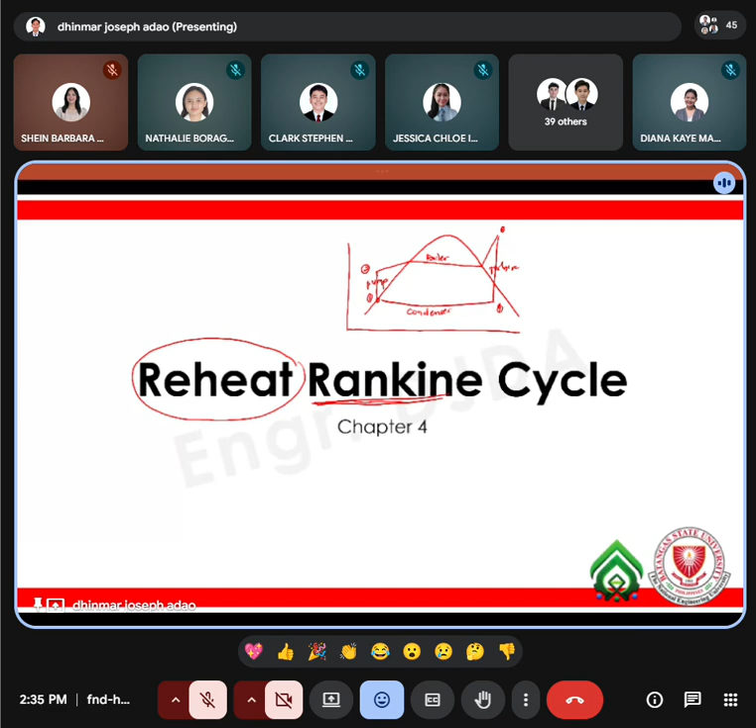Before we dwell more on your reheat Rankine cycle or chapter number 4, here are our ILOs or intended learning outcomes. First is to describe the function of each component in the reheat Rankine cycle.

The components in our reheat Rankine cycle are 5, so we added one. You have your pump, your boiler, your turbines, your reheater, and your condenser. But technically, if you're going to solve all of it, there are 6 components. Why? Because our turbine is now divided into two: your high pressure turbine and your low pressure turbine. Later, you'll see where it is located and how we can solve those components.

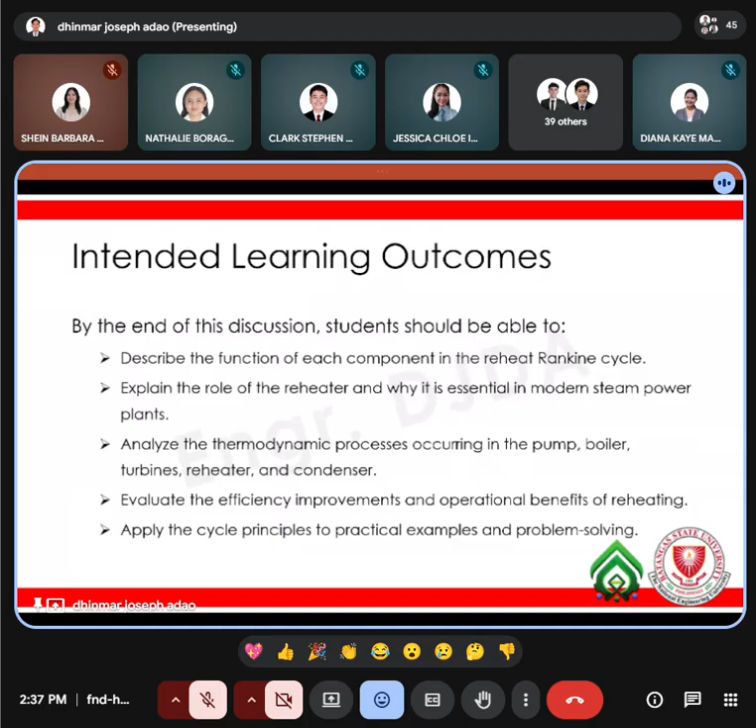Second is to explain the role of the reheater. Why is it essential in modern steam power plants? Third, analyze the thermodynamic processes occurring in the pump, boiler, turbines, reheater, and condenser. Fourth is to evaluate the efficiency improvements and operational benefits of reheating. And lastly, to apply the cycle principles to practical examples in problem solving.

Okay, starting now with chapter number 4, the reheat Rankine cycle, a modified Rankine cycle. As we may recall, as said earlier, this is the Rankine cycle: state point 1, state point 2, state point 3, and state point 4, at which you have your pump, your boiler, your turbine, and your condenser.

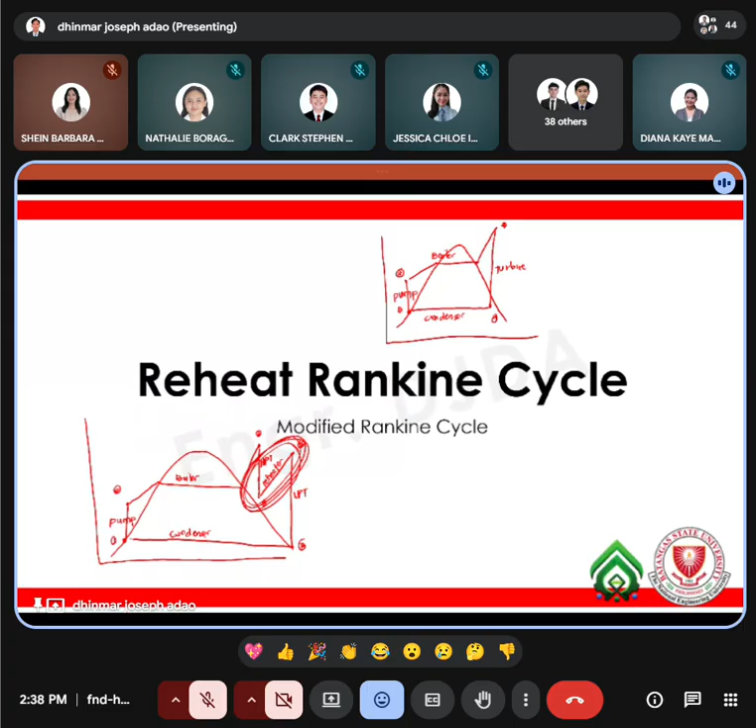Okay, reheat Rankine cycle as a modified Rankine cycle. The reheat Rankine cycle is a modified version of the simple Rankine cycle designed to overcome the limitations that arise when engineers attempt to improve efficiency through higher boiler pressures. In the basic Rankine cycle, the improvements we can make to improve efficiency are these three: lowering the condenser pressure, superheating steam, and increasing the boiler pressure.

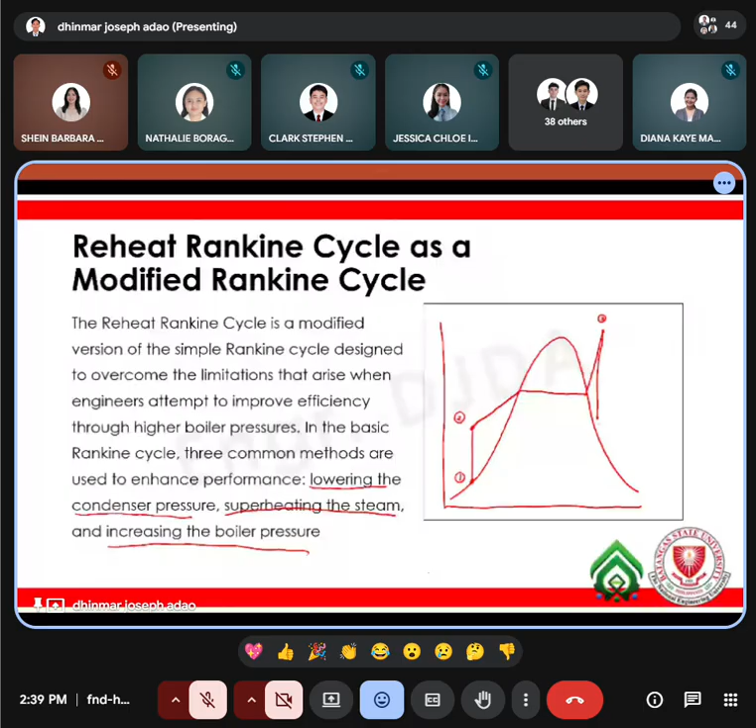These three are what we discussed in chapter 3 recently. And again, let me draw again here a diagram for a Rankine cycle. State point 1, state point 2, state point 3, state point 4, state point 5, and state point 6. And again, from 1 to 2 you have your pump, and 2 to 3 you have your boiler.

3 to 4, that is your high pressure turbine, or HPT. Then 4 to 5, this is your reheater. And 5 to 6 is your LPT, or low pressure turbine. And lastly, 6 to 1 is your condenser.

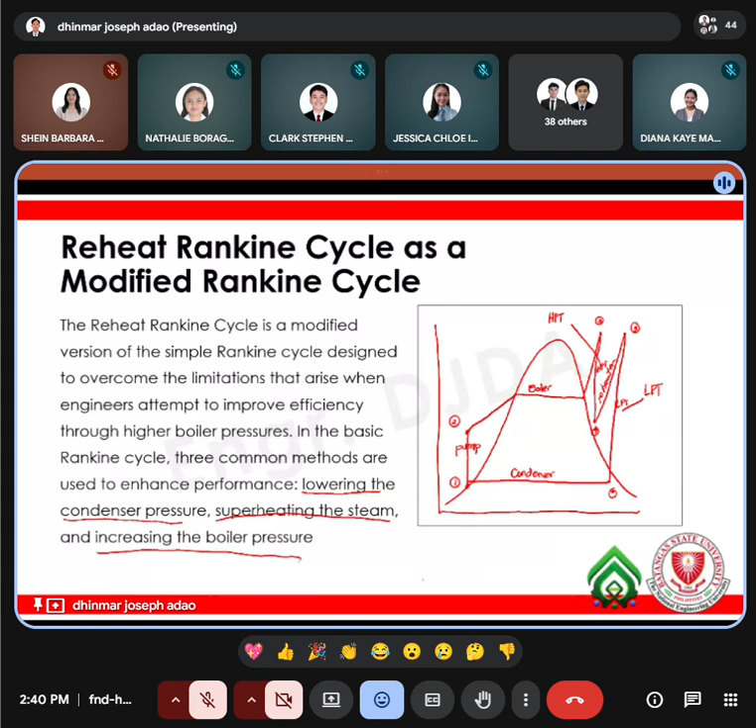Okay, so you have here your first one, your pump. The pump will pump water or fluid going to our boiler. Once it's in the boiler, our fluid, the water, will become steam. So once it becomes steam, it goes to the turbine.

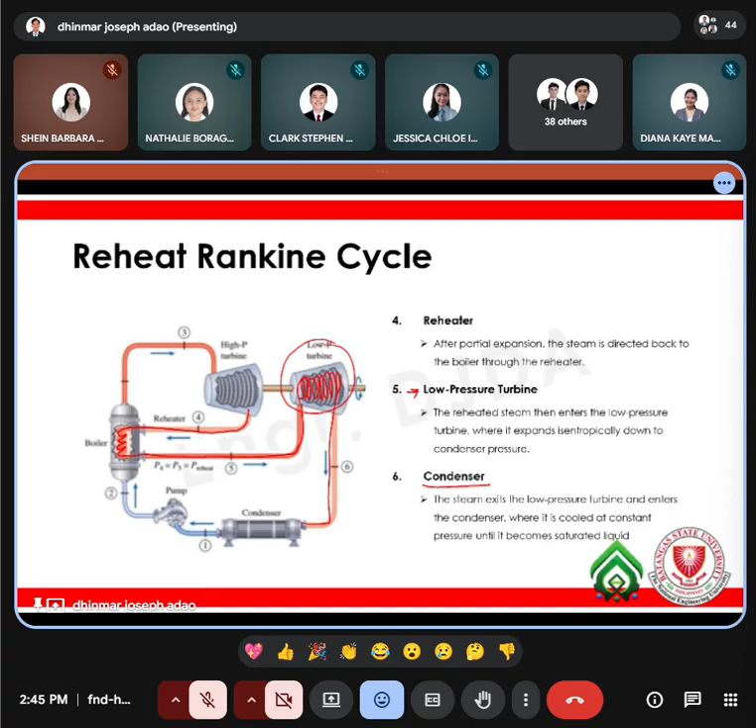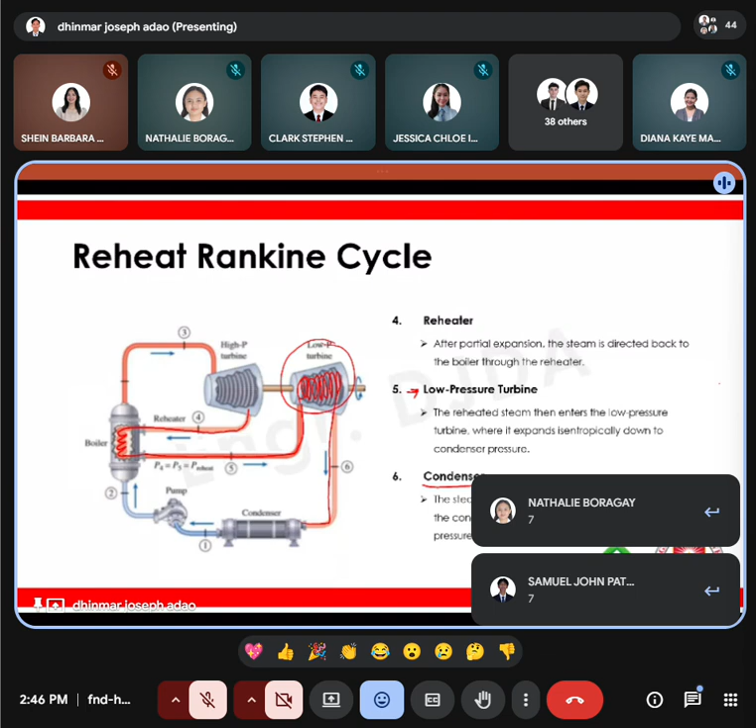Great. Now, after knowing your components, balikan natin yung diagram. Mas madali pa natin siyang maintindihan if alam na natin yung ginagawa ng bawat component. Let's have it here. Okay. Process 1 to 2, this is your pump. After your pump, pupunta naman daw po siya sa boiler, and that is process 2 to 3. This is your boiler.

After your boiler, kapag mainit na daw po yung ating steam, mainit at naging superheated vapor, pupunta daw po siya sa ating high pressure turbine. So, your process 3 to 4 is your high pressure turbine. Then after po magamit ng high pressure turbine yung ating fluid, pupunta naman daw po siya sa ating reheater. And reheater is process 4 to 5. Okay? So mainit na ulit. Na-reheat na natin yung ating fluid.

Ngayon, tapos naman ng reheater, pupunta naman daw po siya sa ating low pressure turbine or LPT. And lastly, your 6 to 1 is where your condenser works. Tinatanggal na po natin dito yung init ng fluid. Goods, mas malinaw na po ba yung diagram na ito? Process 1 to 2 is for pump, 2 to 3 is for boiler, 3 to 4 is for your high pressure turbine, 4 to 5 is for your reheater, 5 to 6 is for your low pressure turbine, and 6 to 1 is for your condenser. Can you tap your reaction po if mas malinaw na siya?

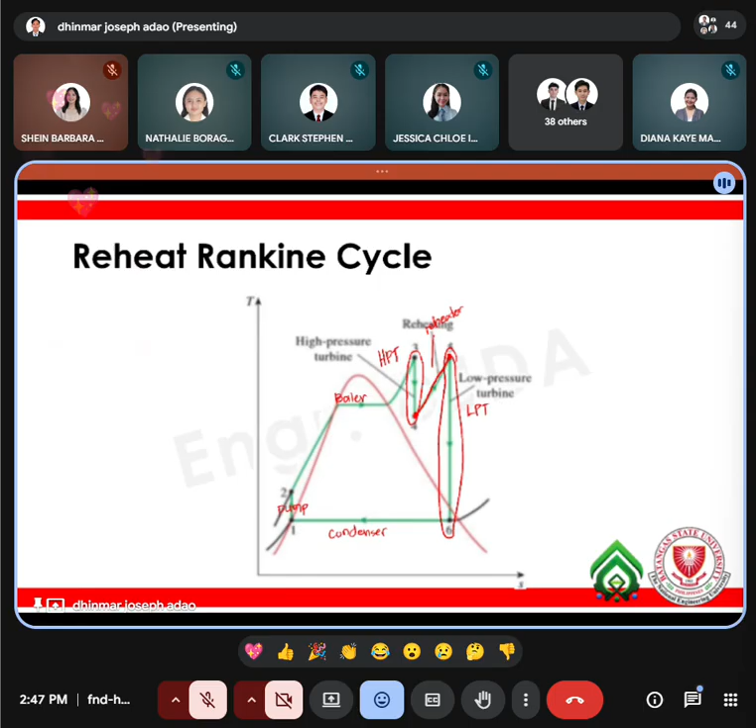Okay, thank you. Now, after knowing your components as well as this diagram, we can now proceed with the energy analysis. Energy analysis, sir? Yun po ba yung mga formulas? Yes. So let's start first with your pump. Saan nga po ulit si pump? Process 1 to 2. Does your pump have work? Yes po, sir. Nagtatrabaho po si pump. And the formula for this one is, which is higher, 2 or 1? Mas mataas, sir, si 2 kaysa kay 1. So technically, the pump work is H sub 2 minus H sub 1. And this is the same as this one.

Next, let's have your heat inputs. Saan po ba tayo nagpapainit? Sir, sabi niyo po sa boiler tsaka sa reheater. So let's start first with your heat input in a boiler, Q in sub B. The boiler is 2 to 3. If you're going to calculate your heat in a boiler, you should use your enthalpy, which is higher, 2 or 3? Mas mataas si 3 kesa kay 2. So therefore, H sub 3 minus H sub 2. So that is your heat input in a boiler.

How about for your reheater? Nagdadagdag po ba tayo ng heat dito? Yes, sir. Sabi niyo po, init po ulit natin yung fluid. Your reheater happens on your 4 to 5. So for your Q in a reheater, that is Q in sub R, which is higher, 4 or 5? Sir, H5 po kaysa H4. Therefore, your formula for the Q in a reheater is H sub 5 minus H sub 4.

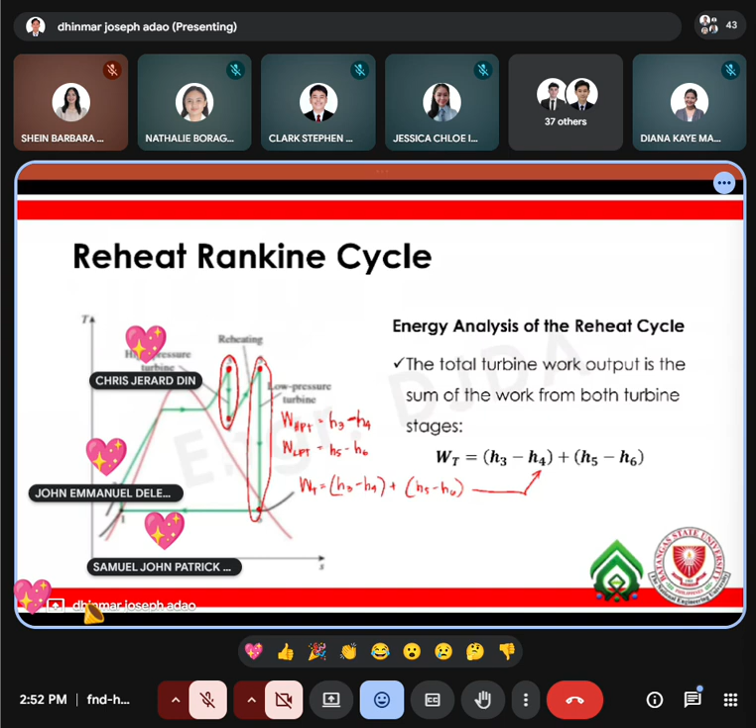Okay, that's good. Now, after getting your work of your turbine, you can now get the last component, and that is your condenser. Sir, saan nga po yung condenser natin? Dito po, sir. So sa condenser, nagtatanggal tayo dito ng heat. And we call that one Q sub out.

Okay. Ano po, sir, ang mas mataas sa 1 at 6? Eh, pantay lang po sila dito. Paano po yun? So you count 1, 2, 3, 4, 5, 6, which is higher sa numbers. So 6. Therefore, your formula here is simply H sub 6 minus H sub 1. And this is the same as this one. Okay? So that is the formulas for your components in a reheat Rankine cycle.

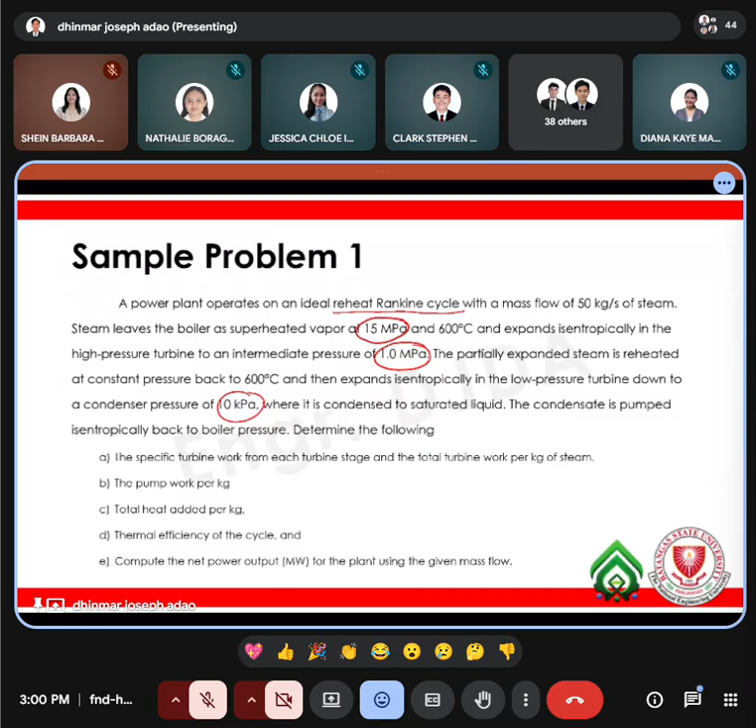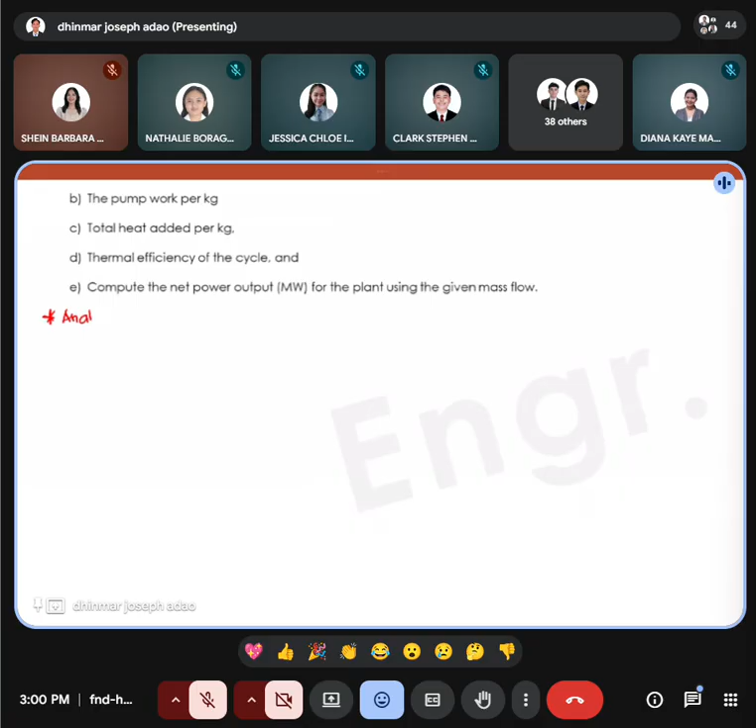Okay, now let's try to have your analysis. Okay, for your analysis, sabi natin, alam po natin na this is a reheat Rankine cycle. Okay, so pwede na agad tayo mag-proceed sa analysis na ganito yung rule. Process 1, 2, 3, 4, 5, and 6. Okay? Reheat Rankine cycle for my TS diagram.

So sabi natin, meron po tayong tatlong pressure. Sulat natin dito. Pressure is 15 megapascal. You have another pressure that is 1.0 megapascal. Isa pang pressure which is 10 kilopascal. Okay, let me give you a tip or a technique para madali natin siyang malalaman kung saan natin ilalagay itong mga pressure nito. Okay, your highest pressure, which is 15 megapascal, is always for the boiler, or kung sino po yung pinakamataas na pressure, siya po yung nasa pinakataas. So, since this is 15 megapascal, pinakamataas po natin dito is dito, 15 megapascal.

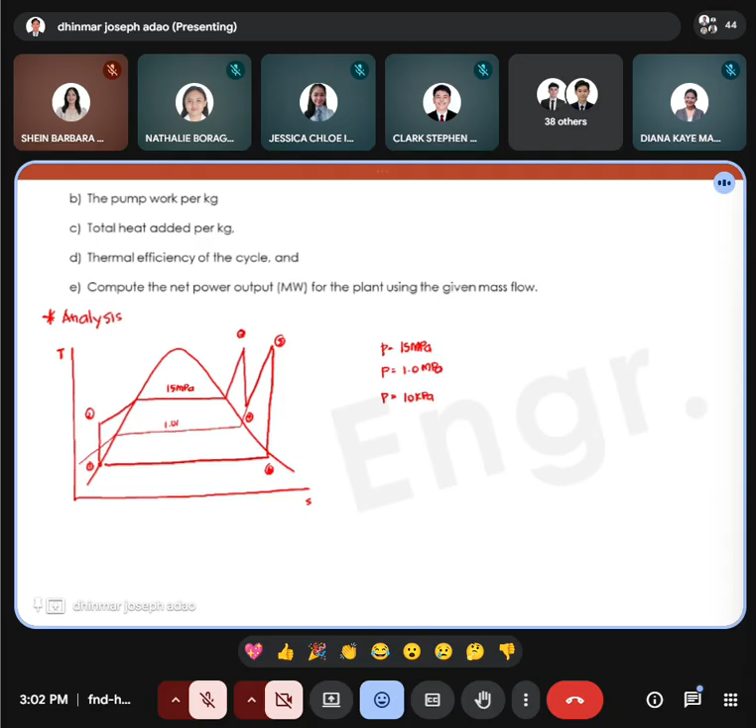Ay sir, saan po yung 1.0 megapascal? Yung 1.0 megapascal po natin is dito. Meron po kasi tayo dito pressure. Okay, so that is 1.0 megapascal. So if you're going to locate, saan po ito? This is 1.0 megapascal. Okay, and lastly, yung pinakamababa nating pressure, lagi po siyang sa condenser. So that is 10 kilopascal. Okay, so try to convert it to megapascal. So this would be 0.010 megapascal.

Okay, let's try to define yung mga pressures po natin on your state points. Pressure of 15 megapascal is for P2 is equal to P3, 15 megapascal. About your P4 and P5, that is 1.0 megapascal. Then your P1 and P6 is equal to 0.010 megapascal. Are we goods? Nakita po kung paano po natin nilagyan ng pressures itong ating diagram or yung analysis, kung paano din po tayo nag-identify ng ating anim na given P1, P2, P3, P4, P5, and P6.

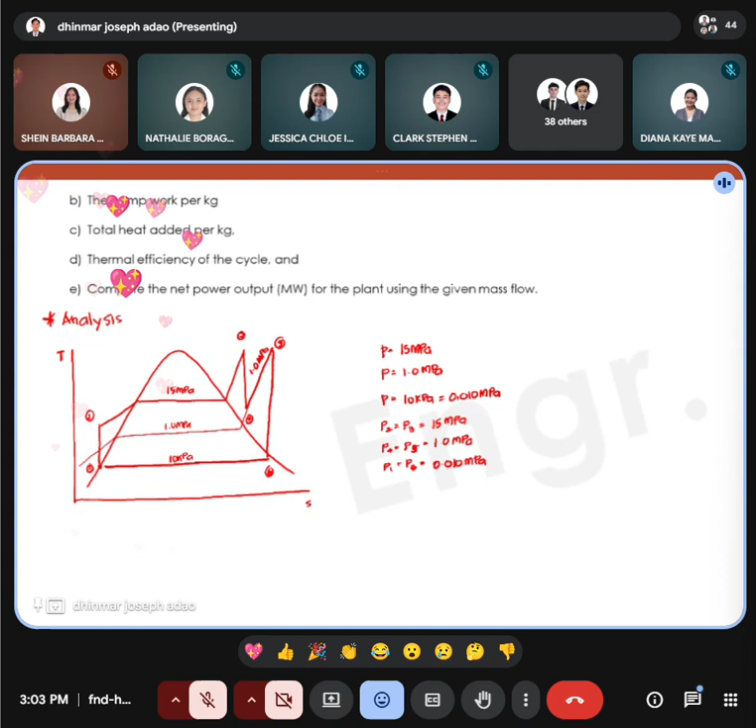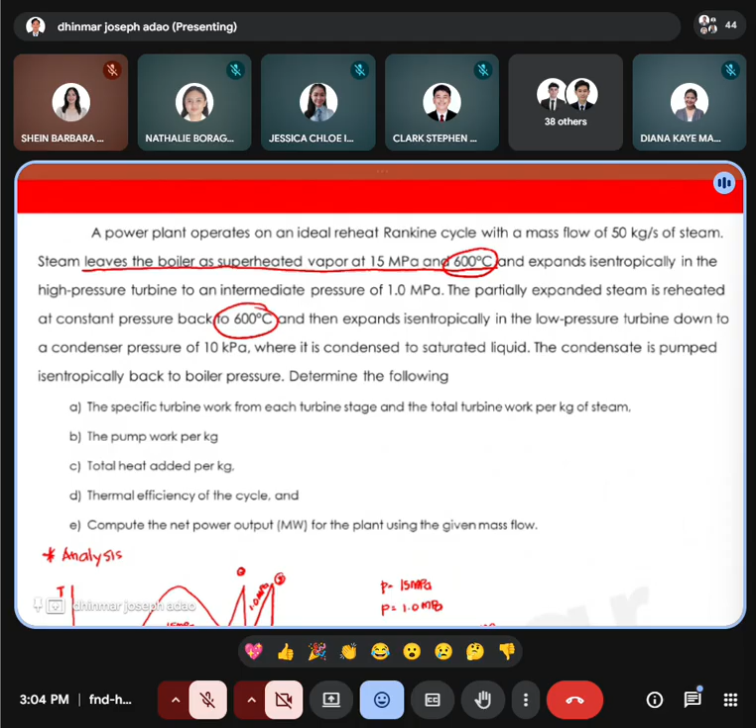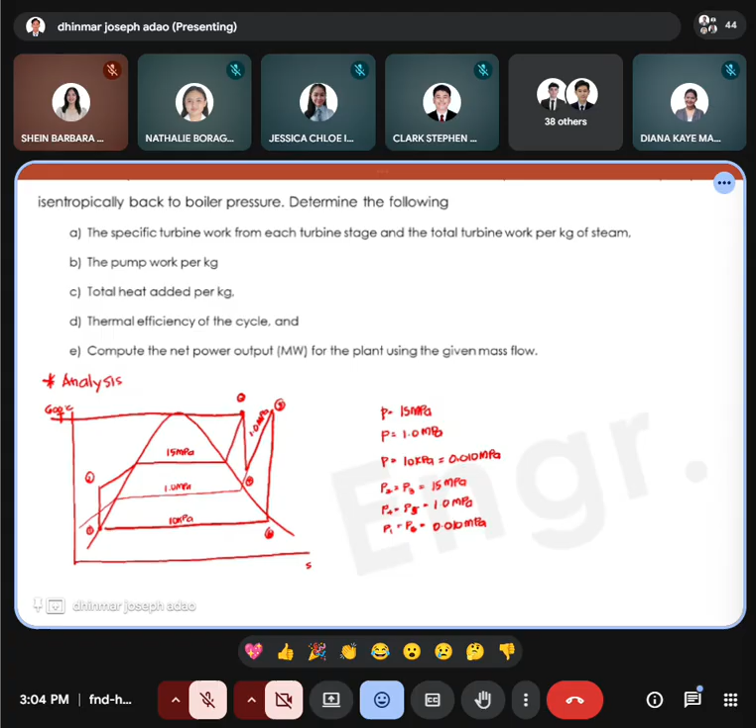Okay? Now, let's try to get other givens from the given problem. We have the given temperatures, which is 600 degrees Celsius and another 600 degrees Celsius. So, saan po namin siya ilalagay, sir? Okay, basahin natin. Steam leaves the boiler as a superheated vapor at 15 megapascal and 600 degrees Celsius. Saan po ba yung exit ng boiler natin? Based sa drawing, based po sa ating kaalaman. Yung exit, sir, ng boiler is state point 3. So, ibig sabihin, sir, dito po namin ilalagay yung 600 degrees Celsius. Okay po. Tapos, sir, yung isang 600 degrees Celsius, ano naman po ba siya?

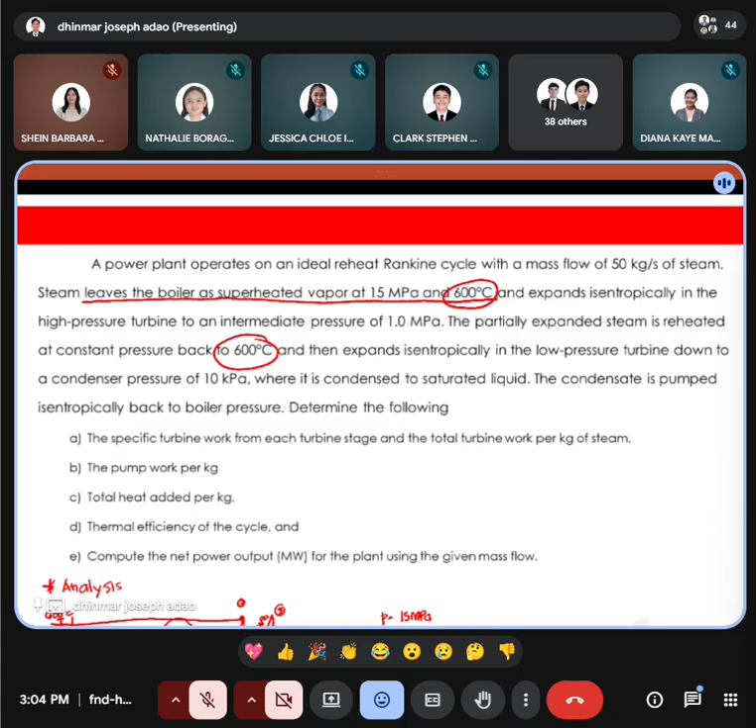Sabi po dito, the partially expanded steam is reheated at a constant pressure back to 600 degrees Celsius. Ibig sabihin, exit daw po ng reheater natin. Saan po ba yung exit ng reheater natin dito? Sir, if this is my boiler, this is my high pressure turbine, therefore, my state point 5 is my exit of the reheater. Therefore, same po ng temperature yung exit ng boiler and exit ng reheater. Sir, pwede po ba yun? Yes po. Sir, what if isa lang po yung ibinigay na temperature? Wala po ibinigay sa exit ng boiler or sa exit ng reheater. So, you must include the assumption na ang inyo pong ginamit na temperature at the exit of the boiler and exit of the reheater is the same.

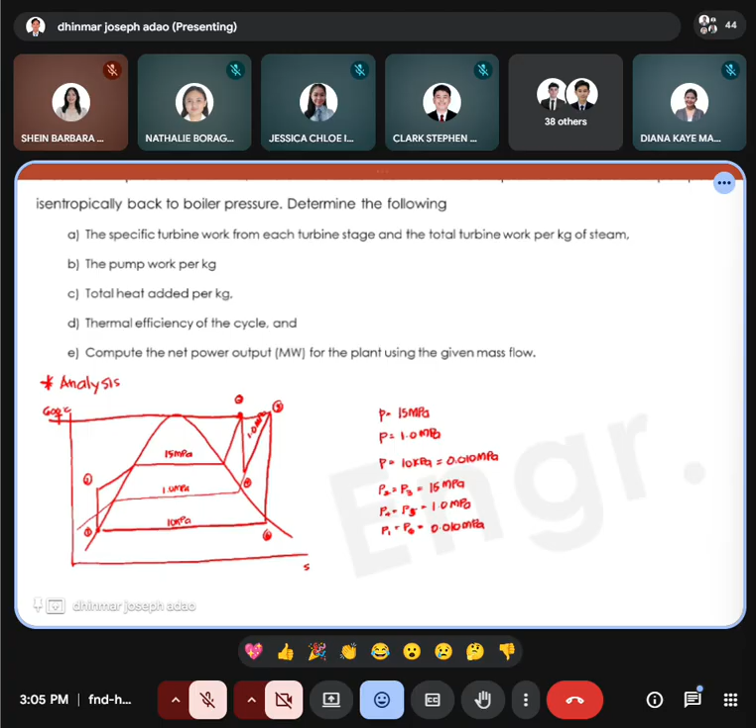Sir, is there a chance na magkaiba po ang temperature ng dalawa, nung exit po ng boiler at exit ng reheater? Yes. Okay? So, from this given problem, dito muna tayo mag-focus. So, your temperature 3 is given by 600 degrees Celsius. And your T5 here is given by 600 degrees Celsius. So, meron na po tayong 8 na given. Maliwanag na po ba yung analysis po natin?

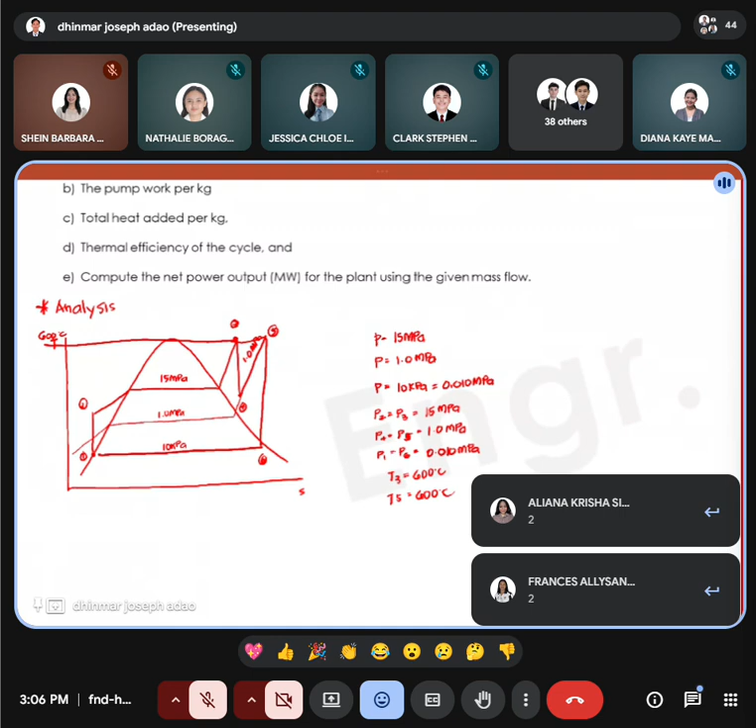Okay, that's great. Now, after doing your analysis, we can now proceed with your solution proper. Okay, let's start with your state point number 1.

That's state point 1. At your state point 1, what do we know here? Sir, alam ko po ang state point 1 po is having a pressure of 0.010 megapascal. And sabi niyo, sir, assume po lagi natin siya na saturated liquid. So if that's the case, this is pressure. You look at your table number 2. Okay? Ano pong hanap ng table 2? Yung H sub F po, which is equals to H sub 1, and V sub F po, which is equals to my V sub 1.

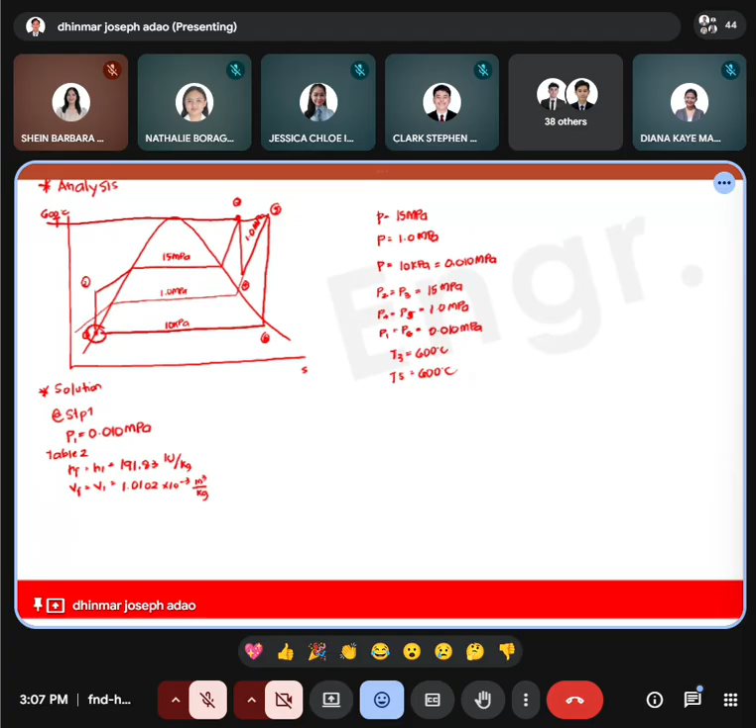So upon looking on your steam table, what would be the value of your H sub 1 and V sub 1? That is 191.83 kilojoules per kilogram, and your V sub 1 is equals to 1.0102 times 10 raised to negative 3 cubic meter per kilogram. Goods. Same po ba tayo? Enthalpy 1, 191.83 kilojoules per kilogram.

Okay. So I have noticed on your exam, yung iba po ang ginamit po ay internal energy. Ang ginamit po nila is 191.82 kilojoules per kilogram. So dapat po kapag tumitingin tayo ng steam table, tingnan po natin ang maigi kung saan po tayo nakatingin. Pwede po sa internal energy, pwede sa enthalpy, pwede sa entropy. But make sure that you have written the accurate value on your thermodynamic property specific.

Okay, so now after getting your state point number 1, we can proceed with your state point number 2. What do we know on your state point number 2? Your pressure 2 is simply equal to 15 megapascal. Okay? Sir, sa state point 2, mag-compute na lang po tayo ng work of pump. Kasi po, mas madali natin makukuha si enthalpy 2. So for the work of pump, you can try to use your formula, V sub 1 times P2 minus P1. So P2 and P1, this must be in kilopascal. So convert it to kilopascal first. Okay? So upon doing and substituting the values, you can now get your work of pump.

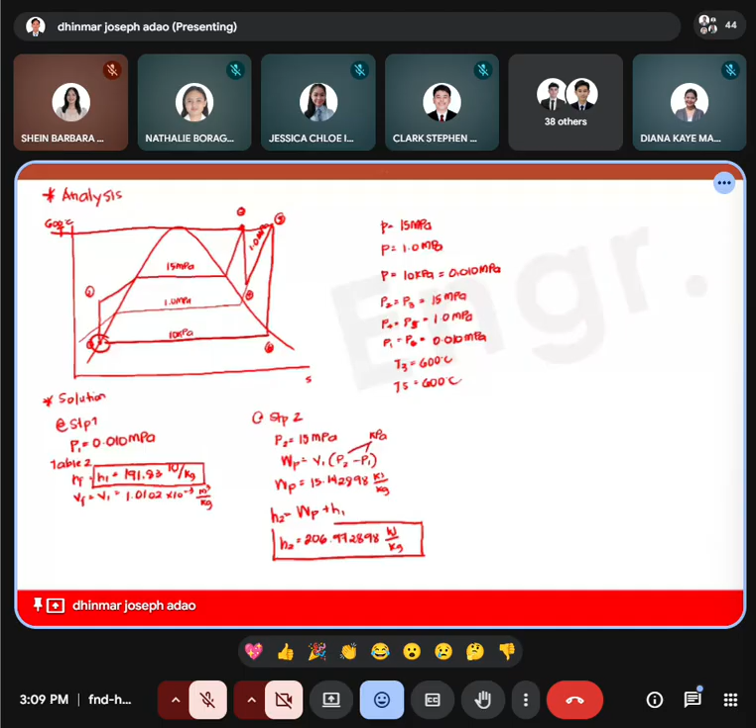So for your work of pump, you can get there the value of 15.142898 kilojoules per kilogram. Okay, so after getting your work of pump, we can now compute for your enthalpy 2. And that is work of pump plus enthalpy 1. That's all. Okay, now, what would be your enthalpy 2? To get your enthalpy 2, that is 206.972898 kilojoules per kilogram. Goods, are we having the same value for enthalpy 2?

Okay, that's good. Now, after getting your enthalpy 2, you can now proceed with your state point number 3. What do you know on your state point number 3? This is P3 is equals to 15 megapascal, and your T3 is given by 600 degrees Celsius. Ano po yung sunod kong gagawin? Sure. Kapag po ganito, tingnan po natin yung pressure. Okay, let's look with its T-sat. What is the T-sat of 15 megapascal? Based on your steam table, sir, 342.24 degrees Celsius.

Now, let's try to compare it with the T3. 600 degrees Celsius, is it greater than or less than your T-sat? Sir, mas mataas po yung T3, yung 600, kaysa po kay T-sat. Therefore, T3 is greater than your T-sat, so you can conclude that this is superheated vapor. Nakakasunod po ba? Can you tap a reaction if nasusundan po? Okay. Now, if this is superheated vapor, saang table pong titingin? Titingin po tayo sa table number 3. So on your table number 3, do we have your exact value for 15 megapascal and 600 degrees Celsius? Yes po sir, meron po. So since meron po, so kuhain lang natin siya.

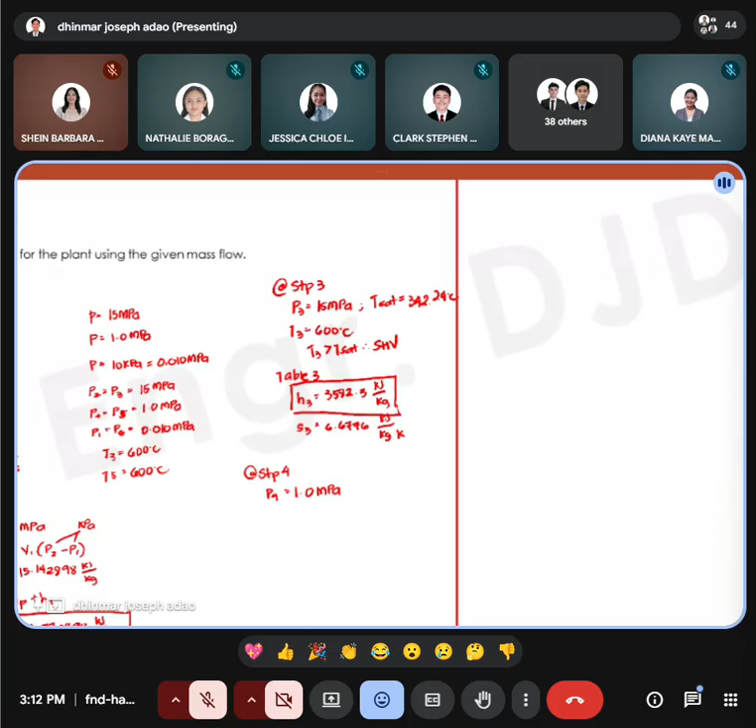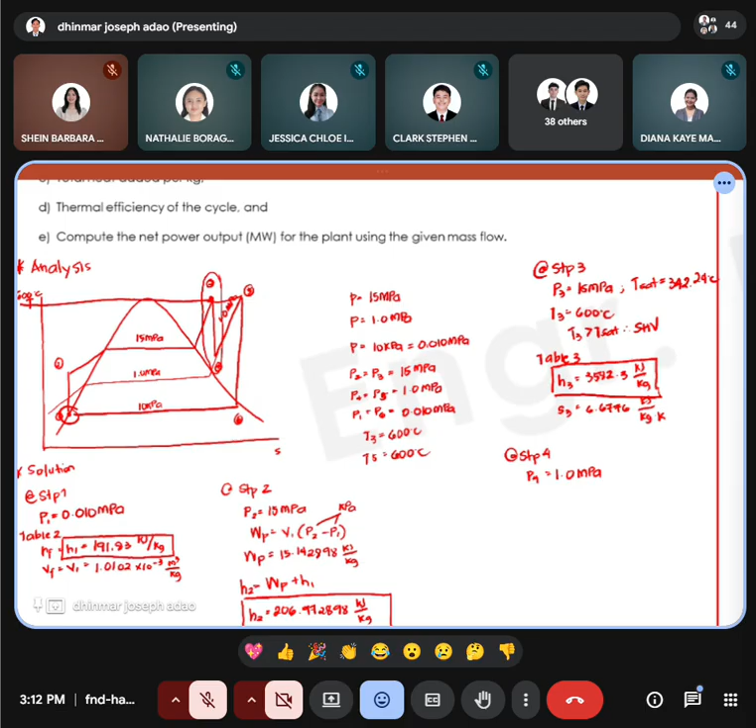At state point 4, we do know that your P4 here is equals to 1.0 megapascal. Ano pa ang alam natin sa state point 4? Sir, based on your drawing here, straight line po ito, 3 and 4. And if this is a straight line, this means this is isentropic. And if that is isentropic, therefore, S sub 3 is equals to your S sub 4. So meron po tayo S sub 3, so we can have your S sub 4. S sub 4 is equals to your S sub 3, and that is equals to 6.6776 kilojoules per kilogram Kelvin.

Okay? Now, you have your pressure, you have your entropy. If that is pressure, look for table 2. On your table 2, kindly look for your SF, SFG, and S sub G. Let's try to ask Engineer Mark Fahilan.

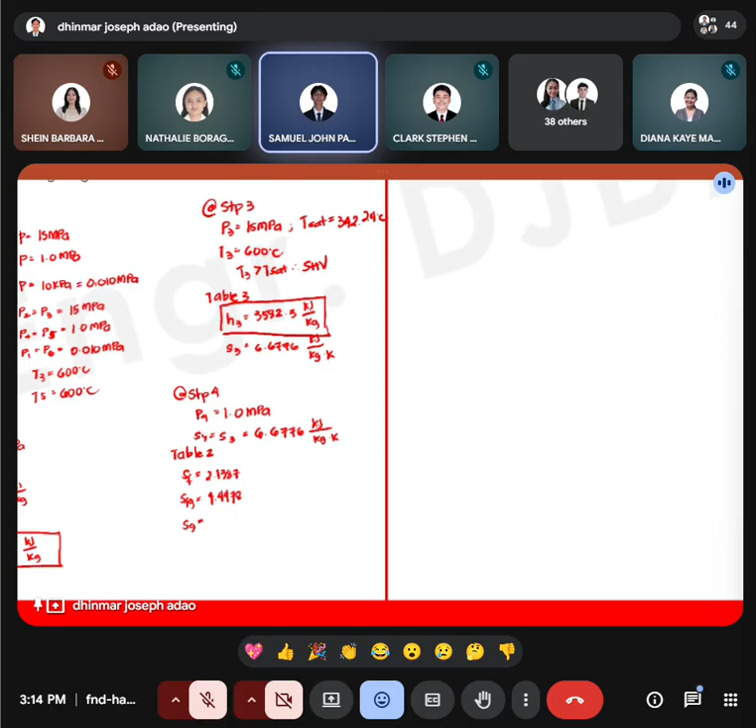Sorry, Engineer Samuel, can you give me your SF, SFG, and SG? Sir, ang SF po ay 2.1387. Ang SFG po ay 4.4478. Ang SG po ay 6.5865. Okay, that's good. 6.5865 kilojoules per kilogram Kelvin. Now, we should compare your given S or entropy with your boundaries: 2.1387 for SF and SG 6.5865.

Now, let's try to compare. Is it less than SF? Is it between SF and SG or greater than SG? Sir, based on this value, yung 6.6776 po, sir, is mas mataas kay SG. So what should we do here? If your S of 4 is greater than your S of G, what is its condition? Sir, mas mataas po kasi siya sa SG, so therefore siya po ay superheated vapor.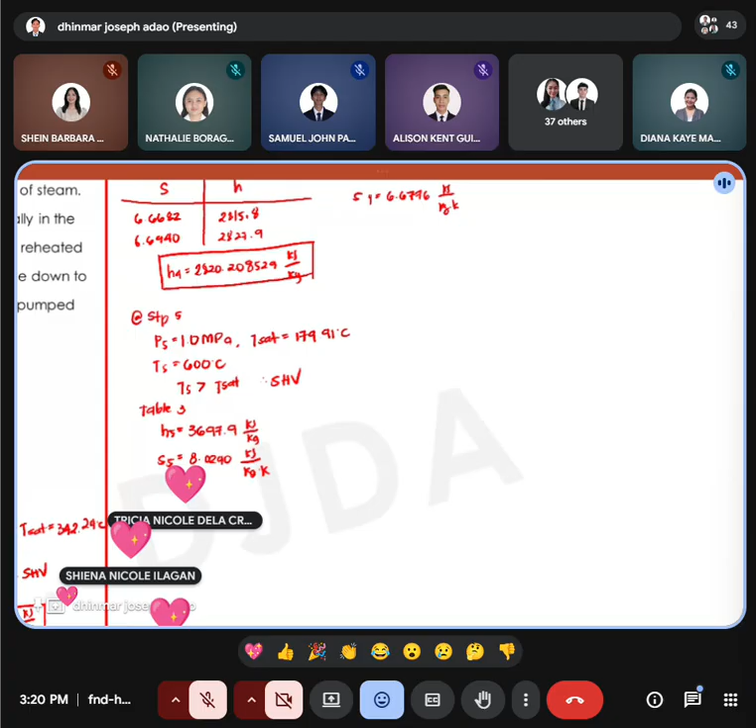Goods with your table number, state number 5. Nakita po ba itong values na ito? Can you tap a reaction if same po tayo nakikita ng values? Okay, that's great. Now, after getting your state point number 5, let's move with the last state point, that's state point number 6. Ano naman po yung alam natin sa state number 6? Meron po tayong given dito na pressure, P6 is equal to 0.010 megapascal.

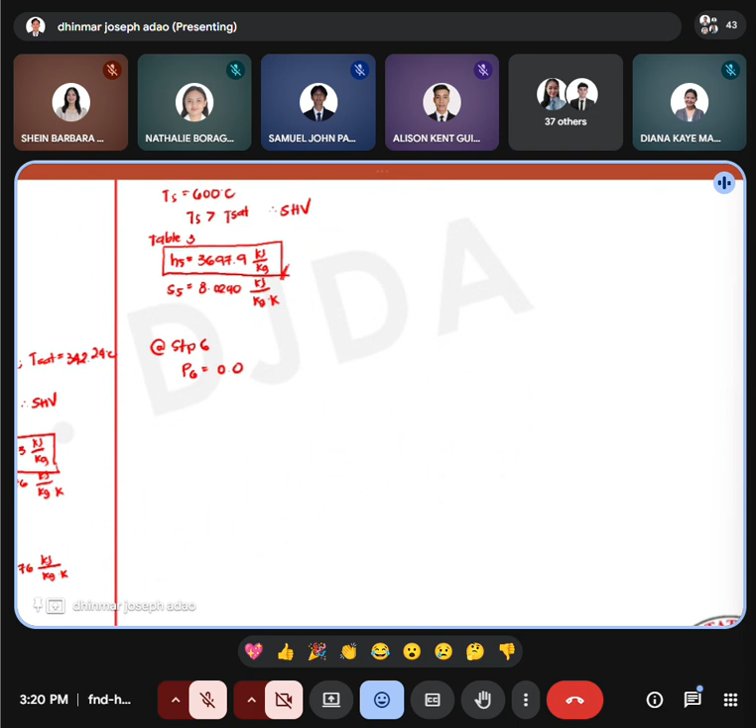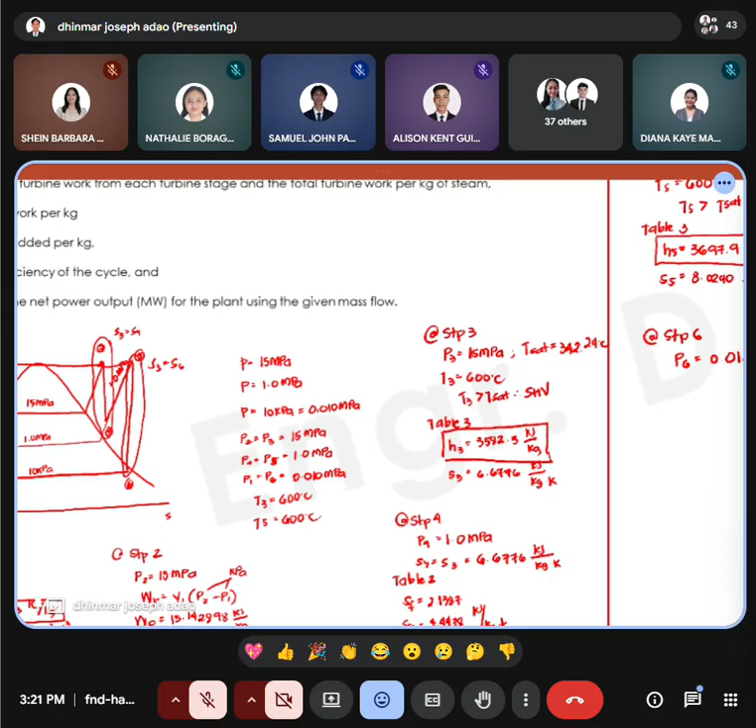Okay, 0.010 megapascal. And looking again on your diagram, meron po ulit tayo dito straight line, 5 to 6. That means it is isentropic. Therefore, S sub 6 is equal to your S sub 5, which is equal to 8.0290 kilojoules per kilogram Kelvin. Now, you have your pressure, you have your entropy. You should now proceed with table 2. Again, this is entropy, so therefore S sub F, S sub FG, and S sub G.

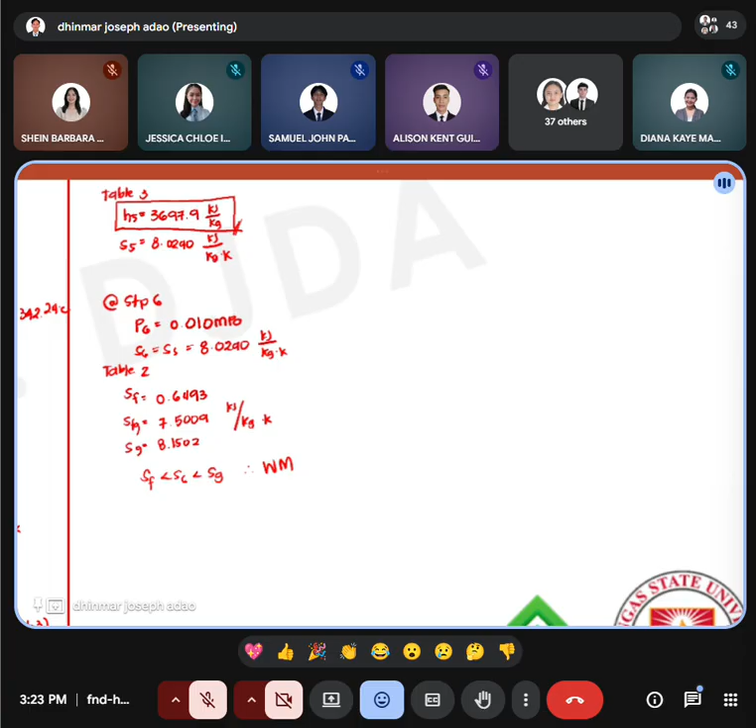Okay, if this is wet mixture, ano po yung sunod natin na ginagawa? We are getting the quality. To get the quality, you use S sub 6 minus S sub F over S sub FG. Then what would be your quality here? Based on your calculations, makukuha po natin dito na quality is 0.983841939.

Then ano nga po ulit yung hinahanap natin sa bawat state point? Enthalpy. So to get your enthalpy, you use your H sub 6 is equals to H sub F plus X times HFG. What would be your H sub 6? Okay, try to compute it.

Engineer Diana Kaye Marandan, Engineer Marandan.

What would be your H sub 6? That's good. That is 2,545.96699 kilojoules per kilogram, and that is your enthalpy 6.

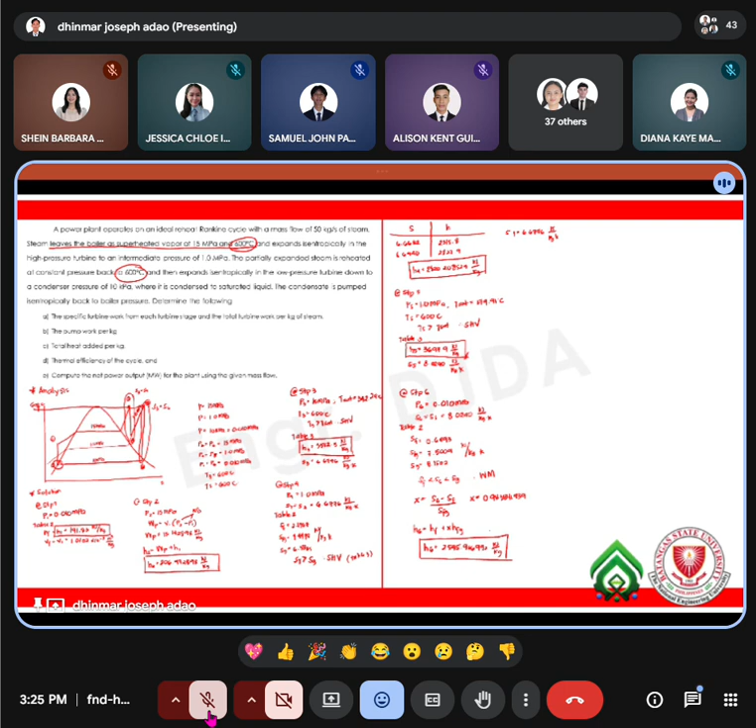So you have there your enthalpy 1 is equal to 191.83 kilojoules per kilogram. H sub 2 is equal to 206.972898 kilojoules per kilogram. H sub 3 is equal to 3,582.3 kilojoules per kilogram. H sub 4 is equal to 2,820.208527 kilojoules per kilogram. H sub 5 is equal to 3,697.9 kilojoules per kilogram, and H sub 6 is equal to 2,545.966992 kilojoules per kilogram.

Sir, pwede ko po ba siya i-store sa aking calculator? Yes, you can try to store it as A, B, C, D, E, and F. Okay, pwede nyo pa i-store sa inyong calculator.

Now after storing the values, what should you do next? Sir, pwede na po ako mag-start sa mga components ko. Let me start with my pump.

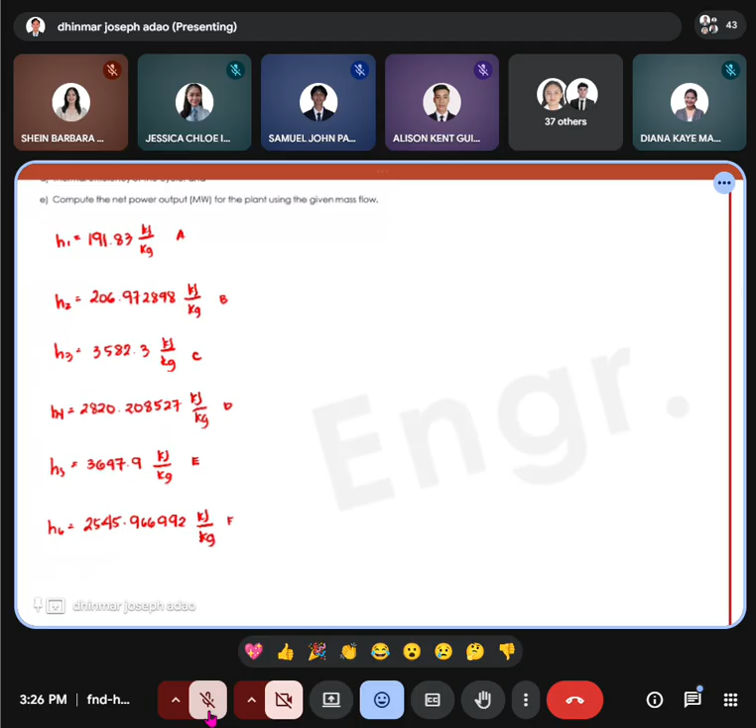For the pump, you can calculate it using, paano po ulit? That is H sub 2 minus H sub 1. So by substitution, that is simply B minus A. And the work of pump is simply 15.142898 kilojoules per kilogram.

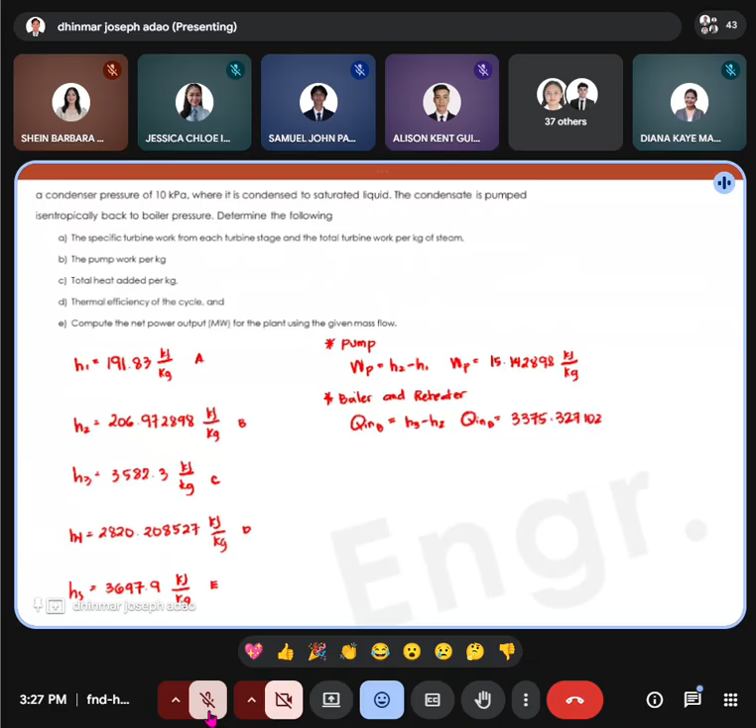After your pump, ano po yung sunod? Let's try to solve your boiler and reheater. Let's start first with your Q in the boiler. Paano po ulit formula nito sa boiler? That is H sub 3 minus H sub 2. So for Q in a boiler by substitution, you have there 3,375.327102 kilojoules per kilogram. How about your reheater?

That is Q in a reheater, that is H sub 5 minus H sub 4. By substitution again, that is E minus D. So your Q in the reheater, that would be 877.691473 kilojoules per kilogram. Okay, nasusundan po ba Q in and Q in for both boilers and reheaters?

Now, after getting your boiler and reheater, you can get now the total heat added. Paano po yun? Pag-a-addin lang po natin si boiler and reheater. So Q in total is equal to 4,253.018575 kilojoules per kilogram.

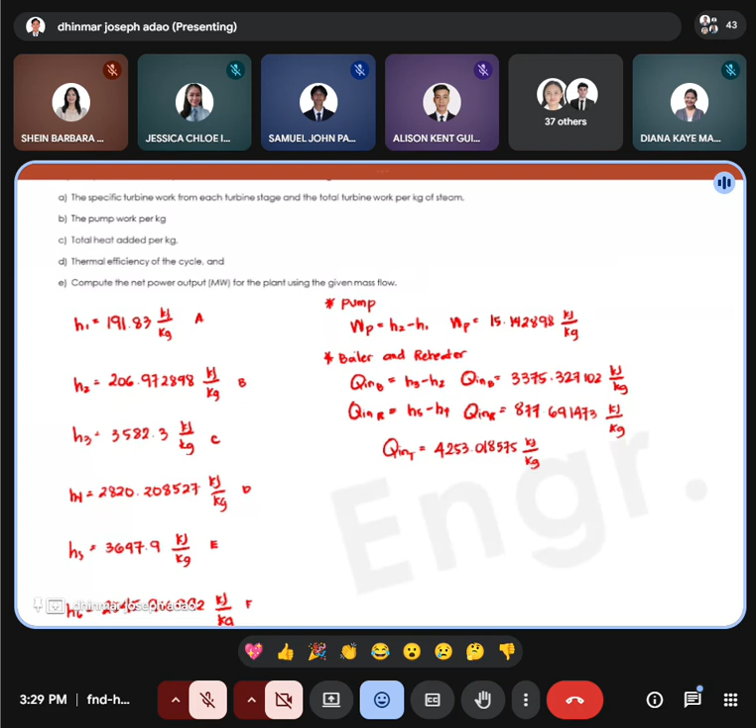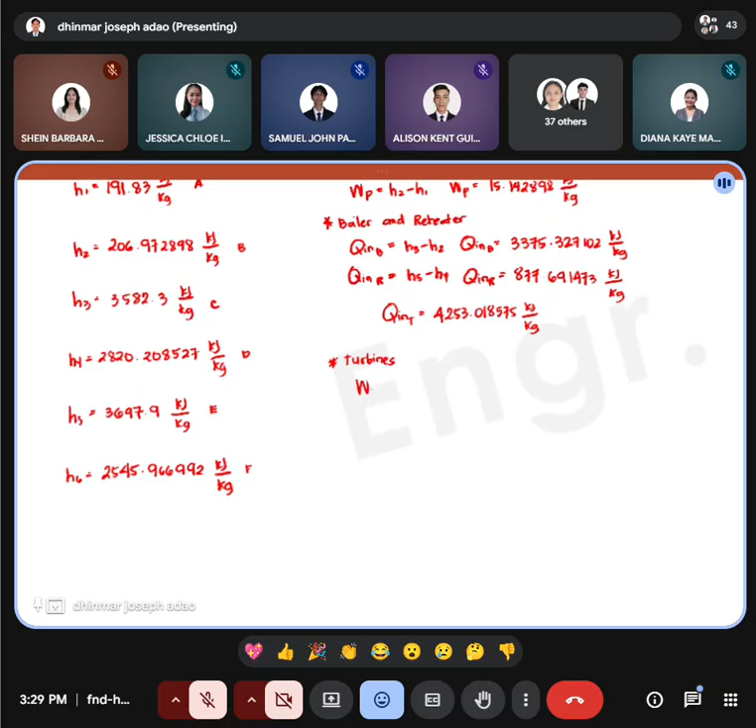Okay po. Now, after getting your boiler and reheater, you can now proceed with the turbines. So for your turbines, we have two kinds of turbine: your high pressure turbine and your low pressure turbine. Let's start first with your high pressure turbine. How can you compute for your high pressure turbine? That is H sub 3 minus H sub 4. By substitution, the work of your high pressure turbine is simply 762.09147 kilojoules per kilogram.

Okay, next, your work of your low pressure turbine. That is H sub 5 minus H sub 6. Substituting, work of your low pressure turbine is simply 1,151.933008 kilojoules per kilogram.

Okay, now you are asked to find also the total work of your turbine. So the work of your turbine is equal to, getting the summation of it, pagsasamahin nyo lang yung work ng high pressure and low pressure, that is 1,914.024481 kilojoules per kilogram.

Okay, that is your work done. Now let's proceed with your condenser, the last component.

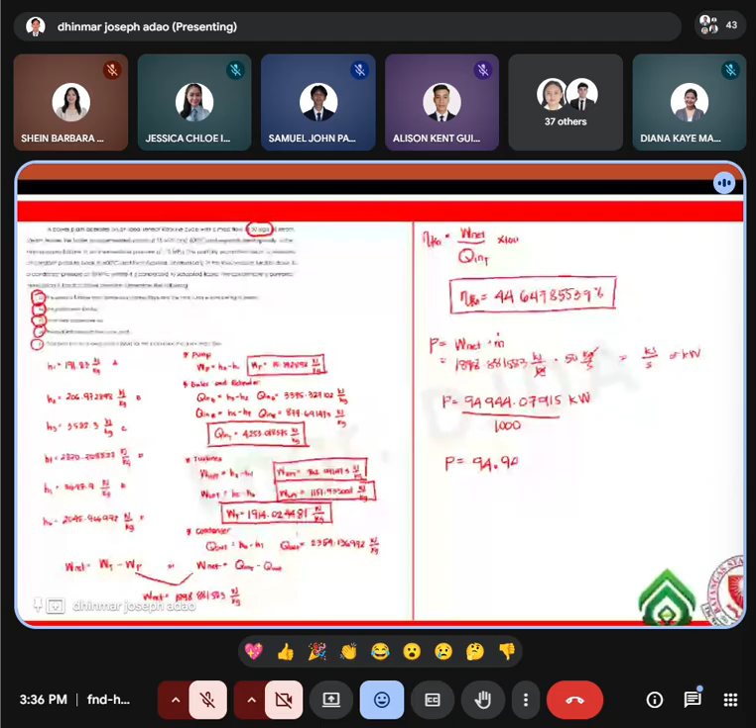Did you follow? So any questions or clarifications with the given sample problem? If none, you can type 10 on your chat box, or if you have a question, you can tap the send button.